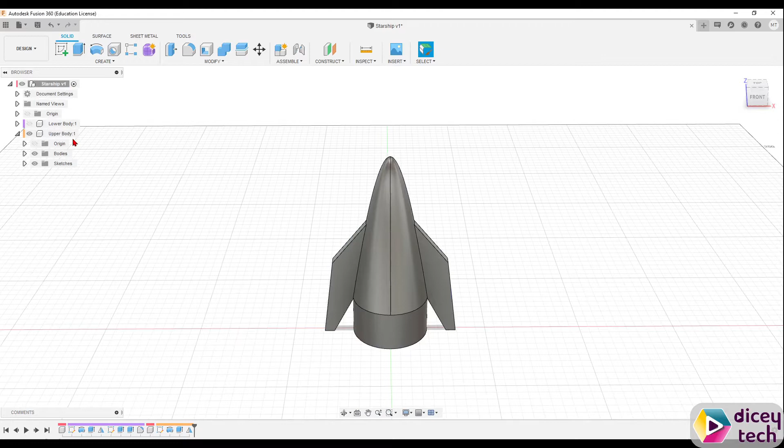For the final part, we're going to be using this tool called Fillet. But first, we need to activate the Starship version 1. Activate component. And then make the lower body visible. Then right click on the upper body, select Move/Copy, move it to the left, and press OK.

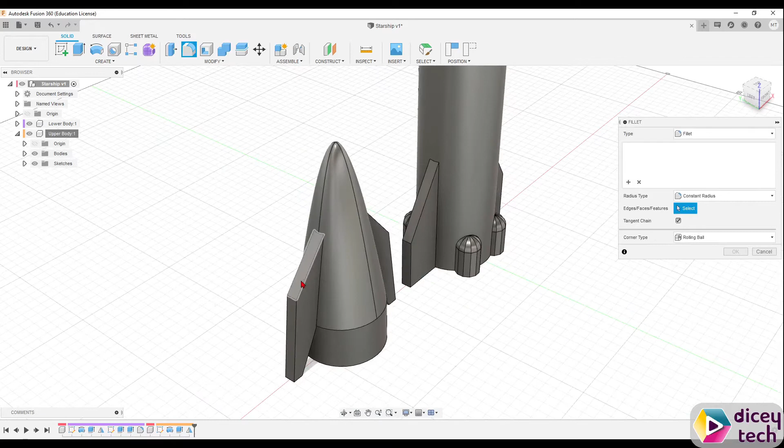Now go to Fillet. Select the edges here: this one, this one, this one, and this one. The same for the other side, and then the same for the fins on the lower body. Like that. Then make them 2.5 millimeters. So you should get something like this.

Then press OK. And now you want to put them together. So assemble, joint.

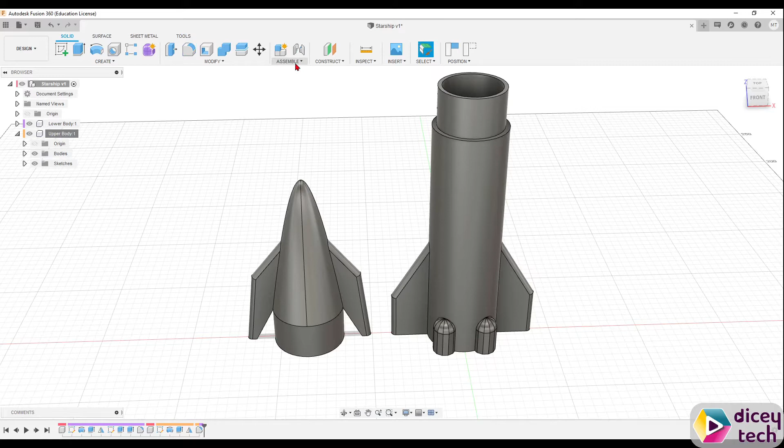Capture position. And then you want to select this face, like that, and then the inner circle here, like that. You should get something like this. It should move up here.

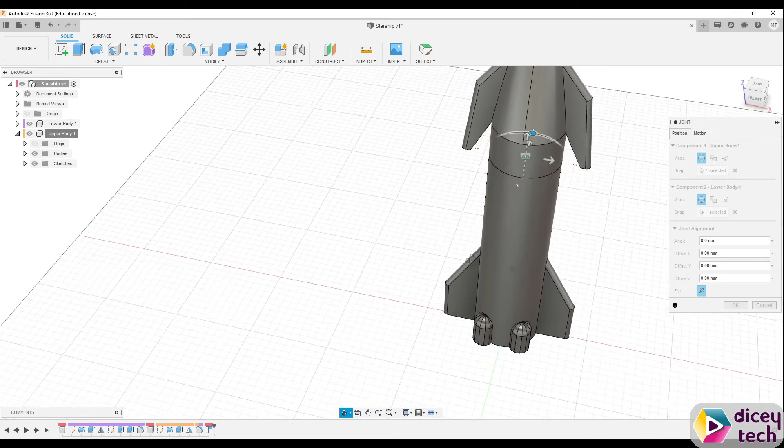And then change the motion to slide. Then press OK.

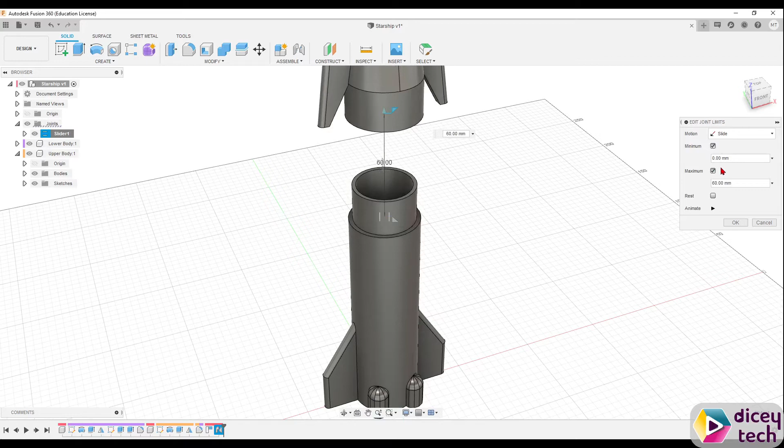And in joint, right click on the motion, right click on the slider 1, edit joint limit. So the minimum and the maximum — the maximum is going to be 60 and the minimum is going to be 0. And rest is going to be at 0. Press OK.

Then right click on the lower body and select ground. And now you can just move it like this. So this is what it will be like in real life.

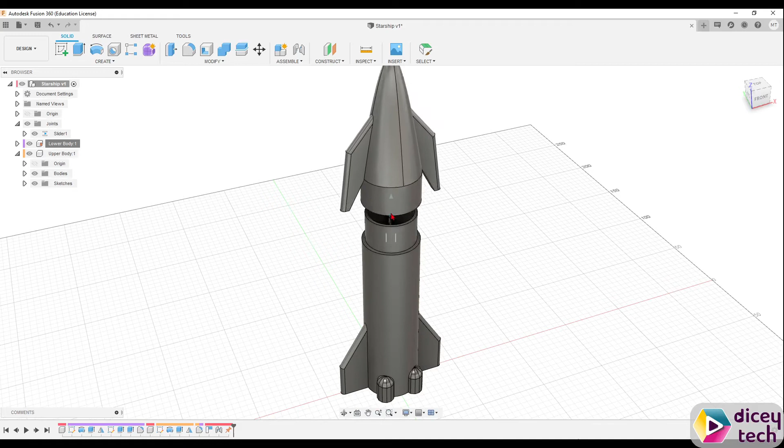And next, press A on your keyboard, and now you can select the color for it. I'm going to use gray, like how we have it as the spaceship. So if you look here, the real one is gray, or you call it silver. After you've done all of that, save your work.

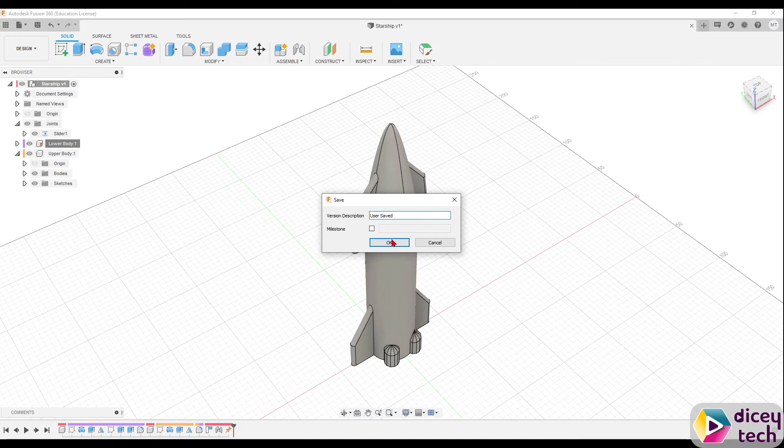And then you want to export your work. So go up here to where it says Starship version 1, or version 2 once you save it. Click on Save as STL. Make sure refinement is on high, and for structure, make sure it's on 1 file per body. This will separate the upper body and the lower body. Then press OK, and save it somewhere where you can find it.

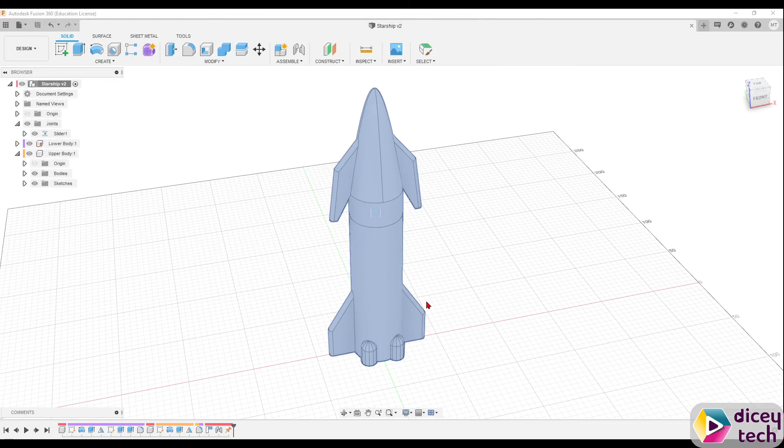I'm going to save mine here. Once you've done that, you can print out your work if you have a 3D printer. If you don't, you can use online services. We have Makerverse, so you just upload your STL file in there. They'll give you a quote, and then once you pay and everything, they'll send and deliver it to your house. And that is it.